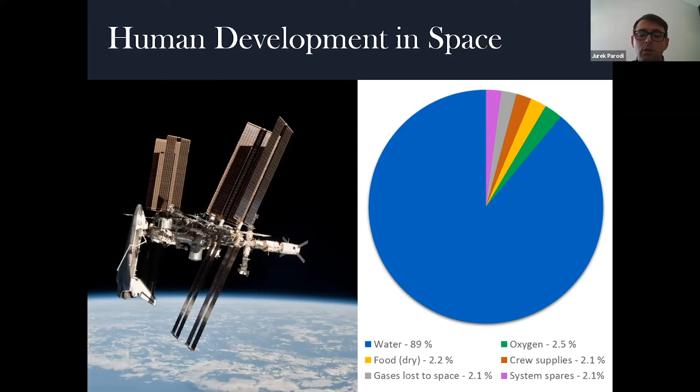Now, going back to the past, water has always been the lifeblood of early human civilizations. The ability of these ancient societies to harness the power of water is basically what facilitated the rise of agriculture and also of the first cities, the first urban centers. This water was so important to these early societies that historians actually refer to them as river valley civilizations.

One of the most powerful civilizations of the past, Rome, made great advances in the movement and the use of water. Rome was the most populous city in the world during the classical ages, with an estimated population of 1.7 million people during the reign of Emperor Augustus. So maintaining the supply of fresh water was a constant challenge for the city and for the city's authorities.

This problem was actually overcome by a system of aqueducts that transported fresh water from the countryside into the urban area. And Roman cities used water in unprecedented volumes. For example, Rome used about 5 times the water compared to San Francisco today.

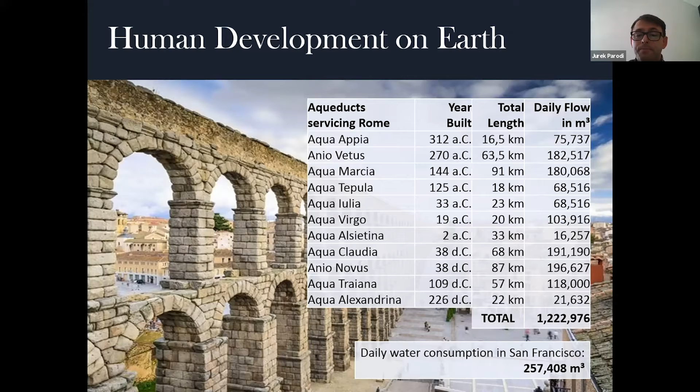Okay, so I'll take over here, right, Jurek? Yes, go ahead, Michael.

So, talking a little bit closer to home, water has traditionally been the limiting factor for development in the Western United States. Access to water historically has controlled development throughout the state, and that's currently the situation as well. I'm sure many of you are familiar with the limitations associated with San Francisco and the peninsula area, and also in Monterey, where water has become basically the spigot that turns on and off development.

In a lot of communities in San Francisco and on the peninsula, any large-scale developments are currently requiring you to provide your own sources of water and your own sources of sewage treatment. The Monterey area, Santa Cruz area has the longest history of this. When I was just starting to work, 30 years ago, I participated in some state of California projects looking at desalination, mainly at the Moss Landing power plant there.

And I remember the state governor at that time saying that he felt that it would be between 20 years and never before Monterey resolved its water problems. And that was about 30 years ago. Seems like the never is more likely than any big desal plants coming into the region.

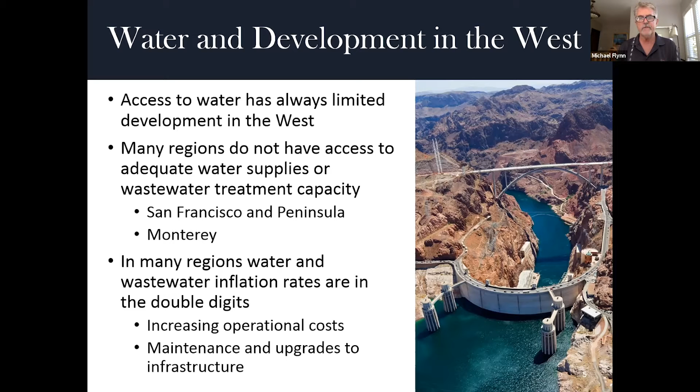But generally, throughout the United States, and particularly in the West, we see that there are 2 main factors that really affect the availability of water and the cost of that water. One of them is increasing operational costs that increase at generally the rate of inflation. And the main one is maintenance and upgrades to infrastructure. Most of the water systems and waste treatment systems in the Western United States were installed over 50 years ago, and they've reached the end of their useful life. And so that means digging up pipe and replacing pipe. And that can be extremely expensive.

This slide shows the results of a study that was done by the American Society of Civil Engineers, and it's a few years old at this point. But at that time, they had done a survey in the United States, and this is just looking at water delivery, not sewer. They found that there was $348 billion in unfinanced upgrade projects. And these are mainly digging up the road and replacing the pipe up to the consumer's house. The vast majority of those costs were included in that.

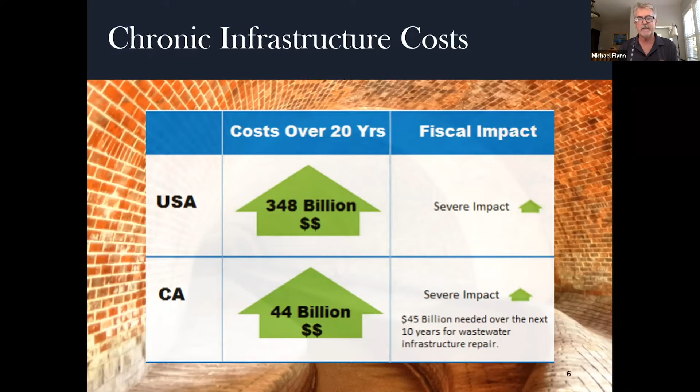California's portion of that was about $44 billion over the next 20 years for water. And if you include sewer issues, California has a requirement of about $45 billion over the next 10 years for infrastructure repair for both water and sewer. And so this is driving water to be actually one of the most inflationary commodities in your life these days. Let's go to the next slide.

So this is a study that was done by USA Today. It's also a little bit old. I think it covered the period from about 2005 to about 2015. So this is looking at published inflation rates for water districts throughout the United States. And these are over 10 years. So this is inflation over a 10-year period. So if you want to know yearly inflation, you have to add a decimal point. So for instance, in Oakland, where it says 68%, the yearly inflation averaged out would be about 6.8% inflation in that area.

And then at the highest level here, we see San Francisco, which during that period had an inflation rate of 21% per year in their water and sewer requirements. And Atlanta is also another interesting place that had about a 23% inflation rate. The situation in Atlanta was so bad that there was sort of a rebellion within the government and within the populace, and they actually removed the requirement for ratepayers to pay the increased price, and they moved the majority of that cost over to a sales tax. So Atlanta has one of the highest sales taxes in the nation right now because they're covering their water and sewer costs through sales tax rather than passing the cost on to the consumer.

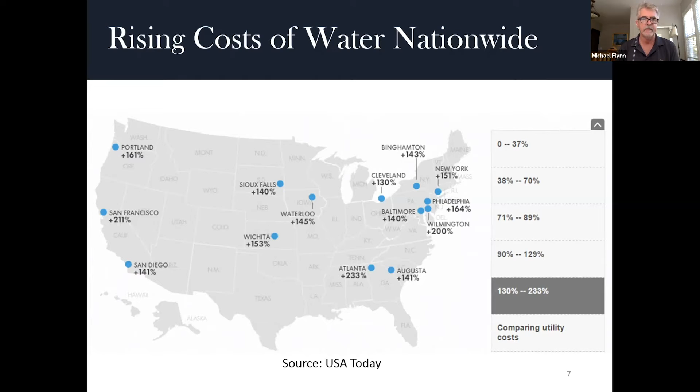San Francisco is also very interesting. A lot of the 21% rate you see there dates back to a period of time when they did a major renovation of their sewer system. San Francisco is one of those cities where all the sewers in the streets ran out into the ocean. And there was a lawsuit against them. So they had to connect them up to the sewers and then expand sewer treatment plants in order to accommodate that. But San Francisco is a good case example. Let's go to the next slide, because they've kind of been a leader in the development of decentralized water recycling systems.

So if you want to build a large building in the city of San Francisco, they do not have water capacity to provide to you. And they also don't have sewer capacity to provide to you. So the city of San Francisco passed an ordinance, the Recycled Water Ordinance, that requires property owners to install recycled water systems in certain types of new construction, modification, or remodel projects.

So these requirements are levied to areas that have a lot of commercial development. So the downtown area of San Francisco, South Beach area, are all covered by that. And also on the avenues where they're extremely water and sewer limited. So all new construction in the city of San Francisco over 40,000 square feet has to recycle its water.

So you guys are all probably familiar with that big Salesforce tower. That fell under this requirement. So that Salesforce tower actually recycles all their black water, purifies it, and reuses it to flush the toilets. In fact, all new buildings that were permitted after about 2018 in the city of San Francisco that are over 40,000 square feet, subdivisions, or new and existing irrigated areas over 10,000 square feet are required to have water recycling systems installed. And those can be both gray water and black water requirements.

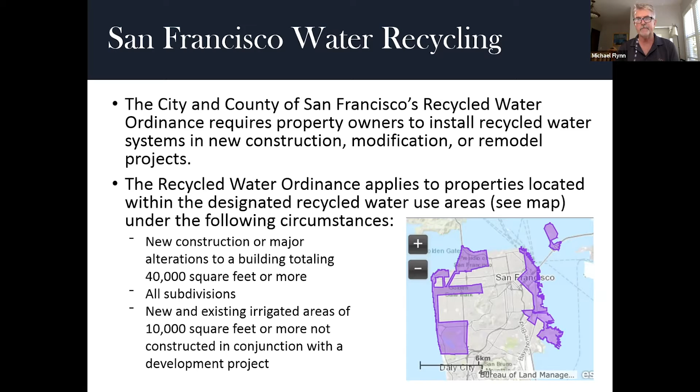And in 2021, according to the published rates in the city of San Francisco, it will actually be cheaper to recycle water in your facility than to purchase water and sewer capability from the city. And that does not include the hookup charges. The hookup charges you have to pay anyway. You can't just recycle your water without being hooked up to the city of San Francisco systems as well. So let's go to the next slide.

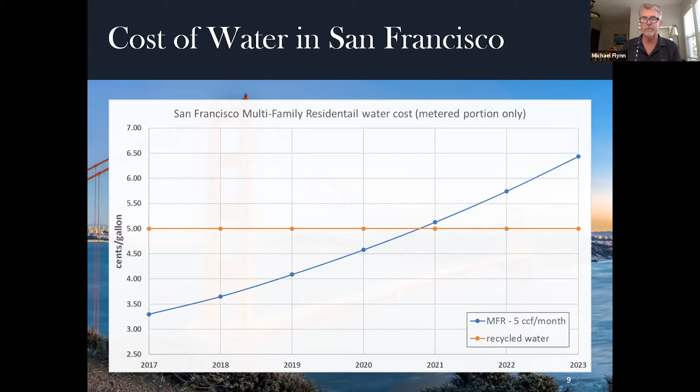So let's get a little closer and talk about Monterey and the history of water in Monterey. The history of water in Monterey has been quite a battle over many, many years. There's been a lot of proposals to build dams, and those have all basically failed. There's been a lot of talk about desalination, and those have come pretty close to going forward, but they've never really made it to the end point. I know the most recent desalination project, I think, was just recently stopped or terminated by the local agencies, and I think Cal-Am even kind of stepped away from that desalination project.

There's also been a lot of state boards that have stepped in, because pumping water from the Carmel River has been violating state regulations for many years. The Carmel River does not flow to the ocean all year round, and that's because so much water is being extracted from it that during the summer months it basically runs dry, which is a violation of many different environmental regulations within the state of California.

And so the state has basically stepped in and started to require Cal-Am and the local region to come up with other approaches in order to resolve that issue. And the most important one is the Order 95-10, which required for them to stop pumping water from the Carmel River in 2017, which I don't think they did.

Then there also was a Sustainable Groundwater Act that dealt with pumping groundwater out of local regions, that limited the amount of groundwater that you can pump out in different areas. There was also more recently Measure J that was passed locally to address public ownership of water delivery systems in District 8, and that's dealing with the Cal-Am issue of a private water delivery system.

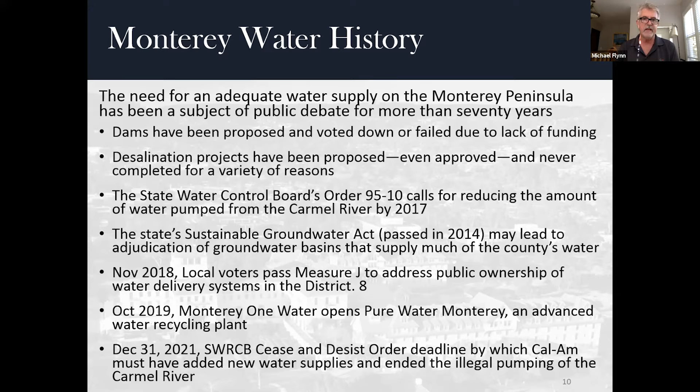Basically what it did, it said that if you install in a house or in a commercial building a gray water recycling system, you can reduce the accounting of a fixture unit by 70%. That means that if you have a toilet, that toilet only incurs a 30% fixture unit requirement for doing your calculations on how many toilets you can have and the meter size that you are providing.

It also went further to include clothes washing. So that gray water can be reused both for toilet flushing, which is commonly done, that's what most people do with gray water, and also for clothes washing, which is actually a little bit progressive. That's a use that typically has used potable water. And so allowing clothes washing is sort of stepping a little bit out in front of the curve by the local jurisdictions. This resolution also requires that these gray water systems provide 100% of the demand.

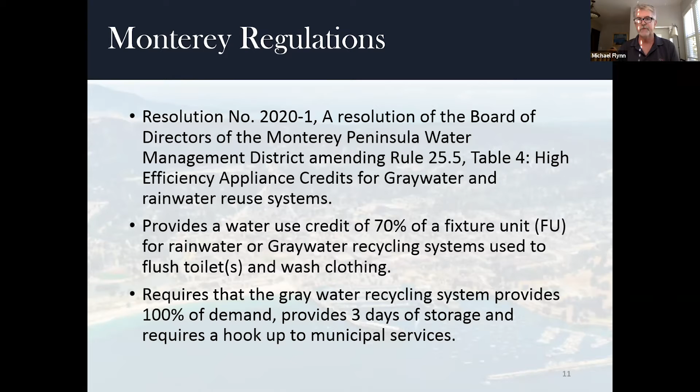So you have to be able to reuse your gray water and, if you're doing toilets, meet all of the toilet demand and also all of the clothes washing demand. It also requires a 3-day storage of product water for doing those applications. And it does also require that you hook up to the city water source and to the sewer. So even if you're not going to be using those for the supply of water for toilet flushing, you actually still have to have the hookup there. So let's go to the next slide.

For instance, the issues we were talking about with withdrawing water from the Carmel River. If the local community was able to come anywhere near to reducing their water consumption by 45%, that in itself would resolve the water issues associated with the Carmel River. So this amendment is actually quite powerful. The issue is what are the economics? How do you make it practically work in those particular applications? That's the devil in the detail that still needs to be resolved in this area. But the situation in Monterey has recently changed.

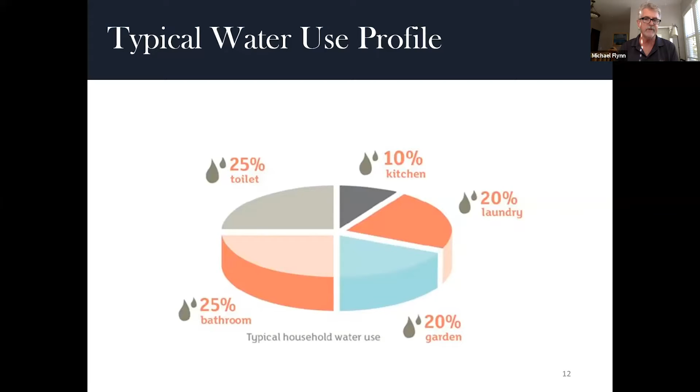It used to be that gray water recycling at a distributed level, at the individual home level or the commercial level, was not actually allowed, was not permitted. And that has changed, and now it is actually permitted. Let's go to the next slide.

So let's step back and just talk a little bit about the state of California too, because just like the local Monterey issue, California also has substantial water scarcity issues. The recent drought of 2014, I think, brought that home to all of us. And in response to that, there's been several bills that have been passed that I think are extremely important. The most important one is SB 966.

What this says is that the state of California has to develop water recycling regulations that cover the entire state of California. So this includes gray water, it includes black water recycling, it includes rainwater recycling, it includes groundwater recycling as well. And this requires by 2021 that the state shall publish regulations that can be picked up by local communities and utilized to provide water recycling capabilities.

The biggest hindrance to implementing, if you're like an architect who wants to build a building that includes water recycling, the biggest hindrance is if you live in an area that doesn't have established regulations and an established permitting process. That means that you're going to be the first, you're going to be the trailblazer, and that's going to be extremely expensive. You're going to have to hire lawyers, you're going to have to hire a lot of engineers, you're going to have to go on an individual one-off basis to try to get approval. And that's going to just certainly drive the price up and make it unrealistic to achieve.

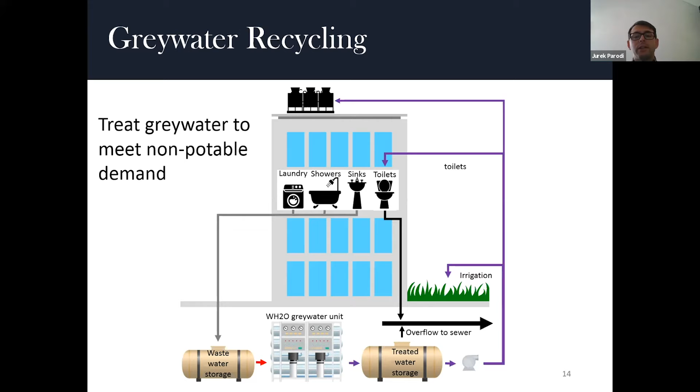So in the case of black water, the main users of black water treatment are actually commercial buildings. The reason why is that commercial buildings usually do not produce enough gray water to meet the non-potable demand. So if you want to provide all the recycled water that meets the demand of irrigation, toilet flushing, and cooling towers, well, there's no other way around recycling all the wastewater, so both gray water and black water.

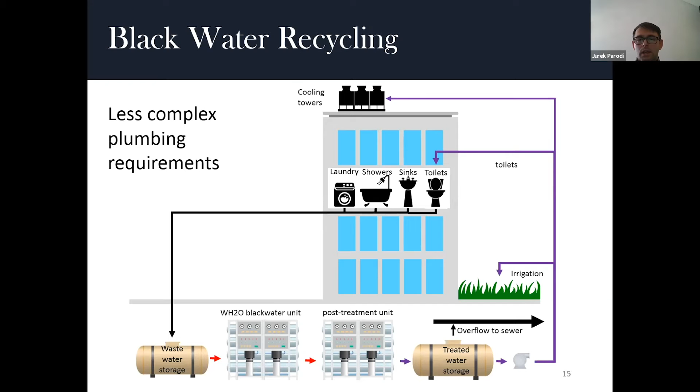So a couple of different benefits for both systems. So gray water, obviously, the capital cost of the system itself is lower compared to a black water recycling system. It is easier, it is simpler to get the permits for the installation of such a system, and also the analytical requirements, so all the tests required to prove the quality of the effluent, are not as strict as for black water recycling systems. They are cheaper to operate in general and to maintain.

Although this really depends on the particular situation, it's more of a case-by-case scenario. The disadvantage for gray water recycling systems compared to black water, as I mentioned earlier, is dual plumbing. Sometimes the cost of this dual plumbing can actually exceed the cost of the water recycling system itself, and in several cases, even by a factor of 2 or 3.

So now let's talk about the black water recycling systems. As I mentioned, the systems don't require dual plumbing, at least from the collection point of view. Obviously, if you're reintroducing the recycled water back inside the building to flush toilets, there still needs to be a separate, dedicated line for that. The black water recycling system has a slightly higher capital cost, and that's due to the fact that it also needs some additional pre-treatment and sometimes post-treatment, depending on the application and also on the regulations.

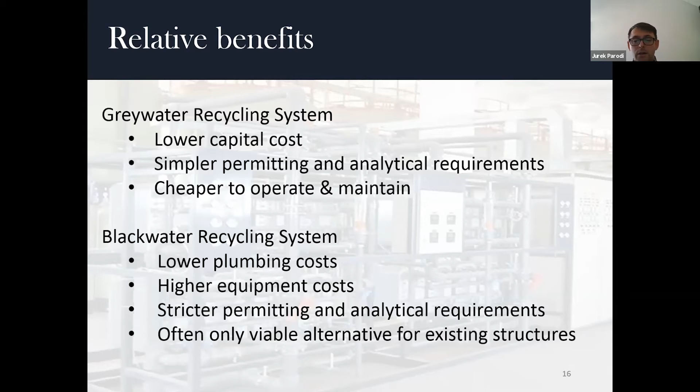So to give a couple of examples of case studies that we have done on systems, both residential and commercial. The first one is a multifamily residential tower in San Francisco. The building has not been constructed yet; there will be more than 700 occupants. The numbers in these tables show that the total gray water supply in gallons per day is about 24,800. Now, this particular building has very limited irrigation, so most of the non-potable water goes back into toilet flushing.

So this non-potable demand is only 12,700 gallons per day. So as you can see, basically, the total gray water available is almost double the total non-potable demand. So in this case, it makes sense to recycle gray water only.

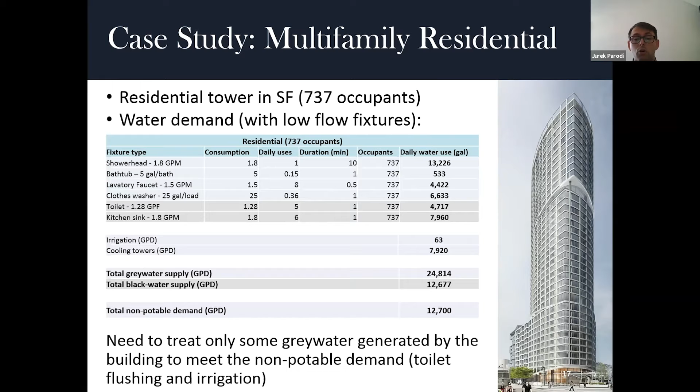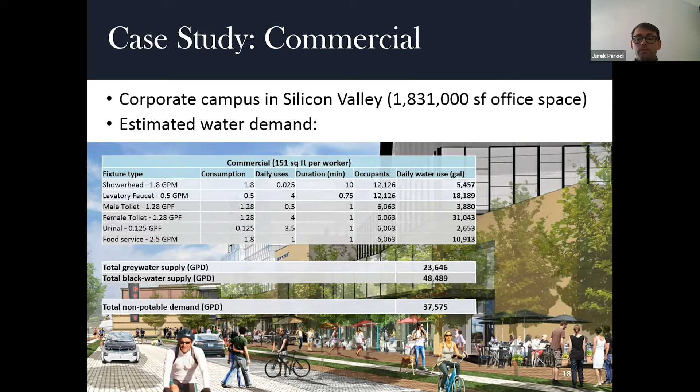Now, in a commercial building, and this particular case study is for a campus of a high-tech company here in the Bay Area, as you can see from the tables, the total gray water supply is only around 23,000 gallons per day, while the total non-potable demand is more than 37,000 gallons per day. So in this particular case, you have to recycle both gray water and black water in order to meet your non-potable demand.

So this is a brief introduction. Michael already mentioned how WH2Osystems was born, but basically it was founded 3 years ago by a team of former engineers from NASA that saw the issues here following the drought that happened in California a few years ago,

and following the fact that the government has invested millions of dollars over the past 30 years to advance water recycling technologies. As I mentioned earlier, right now the space station recycles only about 75% of its water. In order to go to the moon, to have a base on the moon, or even worse, in order to go to Mars and then have a base on Mars, 75% of water recycling is not feasible.

The costs related to providing this needed resupply of water throughout the mission would be too expensive. And so the mission would be a no-go since the very beginning. The only way to get there is to increase that water recovery rate. So go from the current 75% to 95+%, ideally to 100%, although we know that's not possible. But basically at the 95% water recovery rate, that's when a mission to Mars would actually become possible.

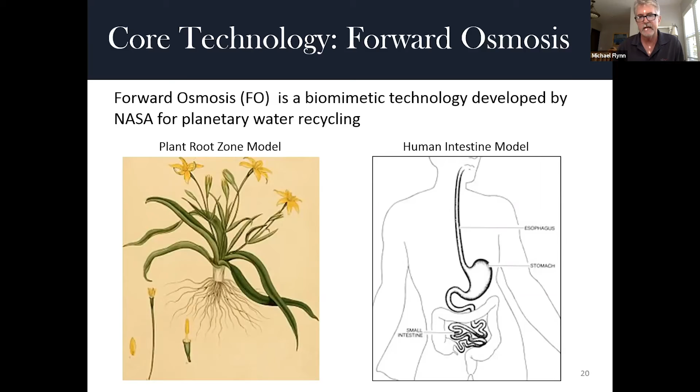Let's go to the next slide. Also a very simple technology. I'm just gonna give you an example of how forward osmosis works. If we have a cup of water and we separate that cup into 2 halves by gluing a membrane between the 2 halves of the cup, and the membrane will allow water to pass, but it will not allow salt to pass. And then on one side, we put tap water, and the other side, we put salt water. What will happen is that the water from the tap side will pass into the membrane to dilute out the salt water. And this is driven by a force called entropy.

Entropy is a force that sort of predominates everything in the universe. Basically, what it says is that systems go from order to disorder. They fall apart. And if you want to go in the opposite direction, you actually have to put energy in them to go the opposite direction. So when we started off with tap water on one side of the membrane and salt water on the other side, that was a very ordered system. And so it wants to go to its lowest energy state, which is disorder, which is to transfer water across the membrane and dilute out the saltwater solution.

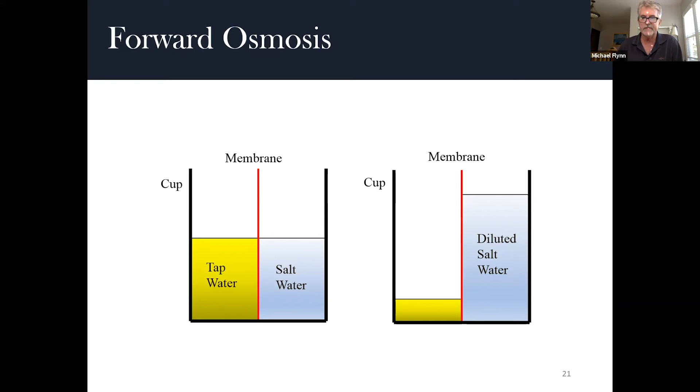And then we're creating this dilute saltwater solution. So we take the saltwater solution and we reconstitute the saltwater solution in an RO membrane or an RO module, or it could be a distillation module, it could be a cooling tower. There are a variety of different technologies that can be used in that place. But the key is that in there, we separate the water back out of the salt solution and then reconstitute the salt solution and provide it back to the FO membrane contactors for reuse.

This is very similar to how the cells in your body work in the blood. Your small intestine acts as a forward osmosis module, extracts water that you consume, puts it into your blood. The blood then goes to the cells. The cells extract pure water from the blood plasma and then recirculate the blood plasma back into your small intestine.

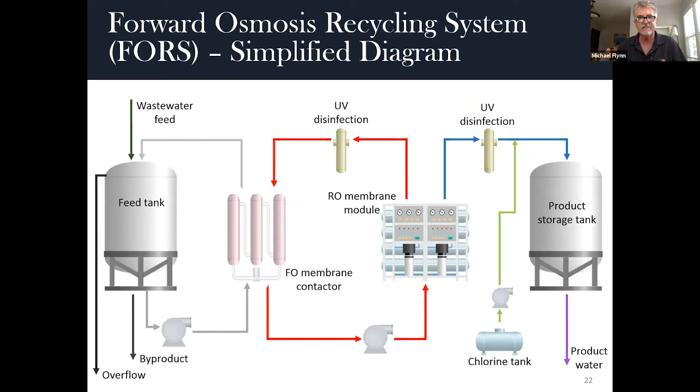So this is what we call a biomimetic technology. The reason for developing it was we were trying to develop a new class of water recycling systems that had a level of reliability that was orders of magnitude above what the current state of the art is. And so we went and looked at biological processes and took the lessons learned from them and integrated them to develop this technology. So let's go to the next slide.

So we're going to go through some case examples. Since we're short on time, I'll go briefly through some of the projects that we have done in different case studies. So the very first greywater recycling system that we have developed, which is the first continuously operating greywater recycling system in California, is actually at Moffett Field here in California. And it provides recycled water for toilet flushing inside an office building that hosts about 220 workers.

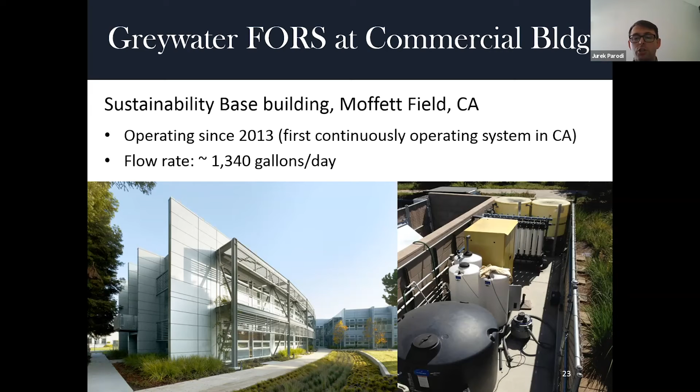This system, however, is the biggest from a flow rate point of view. In fact, it treats about 4,800 gallons per day. So this is, let's say, between 3 and 4 times the system that we have installed at the office building. And it's also contained in such a small footprint.

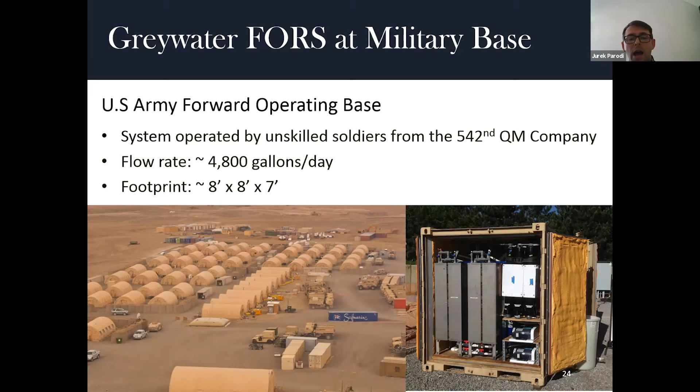Well, not only that, this particular system had to be transported, airlifted, and airdropped. So there were also a lot of other requirements. It is used in these so-called forward operating bases, which are the smallest bases surrounded by defense walls that the U.S. Army uses in Afghanistan. So that's where the system operates.

Since we are here in California and close to Napa and Sonoma Valley, we have also developed systems for winery wastewater, which is in reality one of the toughest, most challenging wastewaters to be treated. So we have used forward osmosis, but we have used it in synergy with other technologies. In particular, in this case, it was distillation. And that's in order to achieve an even higher water recovery rate.

So as I mentioned earlier, right now the forward osmosis system can achieve about a 75 to 80% water recovery rate. However, in order to get beyond that 80%, we installed other technologies, for example, distillation. That allows us to go well beyond a 90% water recovery rate.

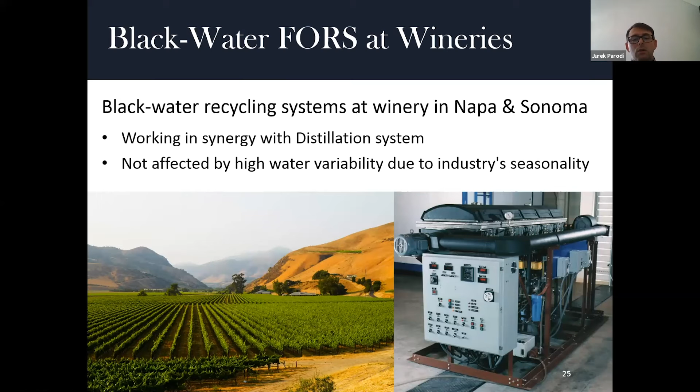Another great application for forward osmosis is cooling towers. As Michael mentioned earlier, the second part of the system, the one that basically concentrates the so-called osmotic agent, can be done in different ways. And one of them is through the waste heat that is generated at cooling towers. So basically, this is a very cheap and effective way to recycle water. And also very safe because there's no human contact in this case. All commercial buildings, big data centers that use a lot of water for cooling, can reduce their water consumption by up to 90%.

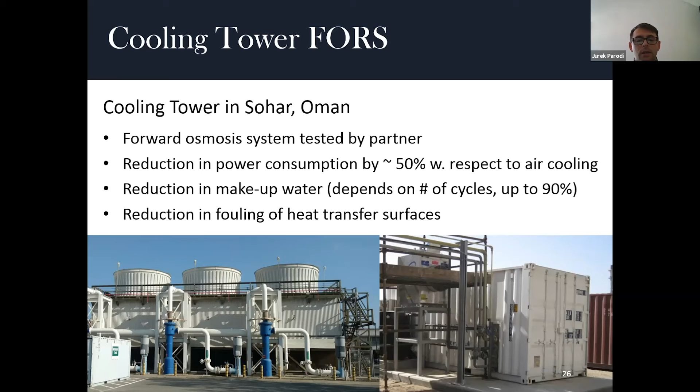And then another system that we have been developing, and this was actually our first black water recycling system, was developed for a high-tech campus here in Silicon Valley. Being the very first black water recycling system that we have developed, the customer wanted to validate it using a third party, which in this case was Stanford University.

So basically, we built the system, we sent it to Stanford, and Stanford operated it for about a year. They collected samples of the effluent every day, and they were doing biological and chemical analysis every day in order to validate it.

And finally, another system that we have been developing, and we are actually currently developing, is for the food and beverage industry, for a big multinational that does both carbonated drinks and high sugary drinks and also snack food. In this particular case, the wastewater is also challenging because of the very high content in sugars, electrolytes, salt, food residues.

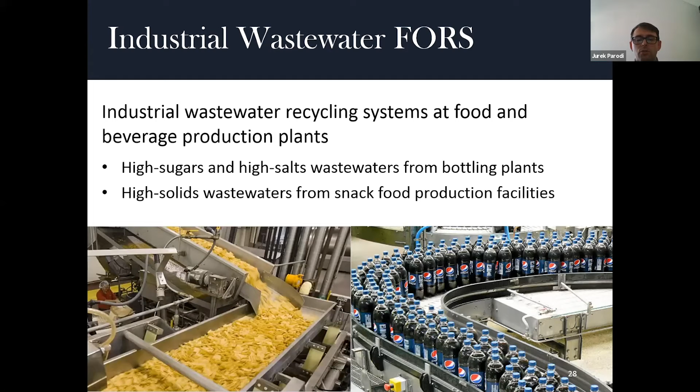Oh, and finally, actually, this was, I think, my last slide. We also developed a system that is mobile, so it can be moved around. It's installed in a 6x10 trailer, and this system is actually pretty small. It treats about 150 gallons per day. This is basically the flow rate, the volumes that are applicable to a large single family home. A single family house would probably use somewhere around 100 and 150 gallons per day.

So in terms of water quality, Michael, you want to go through these ones? Yeah, so one of the things that came out of the testing from Stanford was a comparison of the performance of the forward osmosis system and the existing regulations with respect to recycling wastewater. This doesn't take into account the new activities going on with the state of California, but if you look at, for instance, the plumbing code, the National Sanitation Foundation has published some directions through NSF 350. And then the city of San Francisco has very detailed gray water and black water recycling requirements.

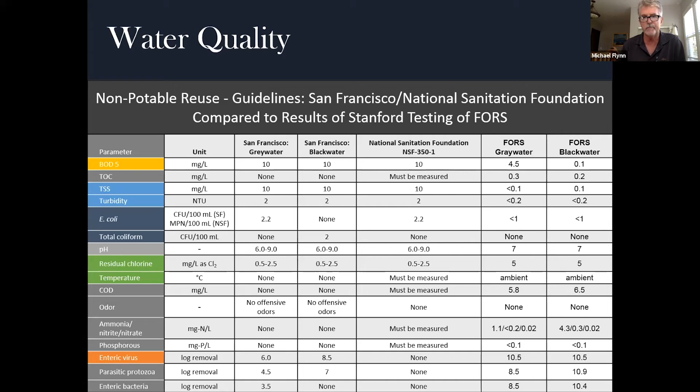This table basically goes down through all those requirements and shows you that the FO, both for gray water and black water systems, meets all of those requirements. So the system as it is right now can be permitted regardless of whether you're using the San Francisco standards or the National Sanitation Foundation standards. It's expected that the new direction the state of California will be coming up with will be more based around the city of San Francisco requirements. So I think they're the more important ones to be looking at in a table like this. Let's go to the next slide.

The other issue is the future. If you invest in one of these kinds of technologies and you meet all the permitting requirements that exist right now, what about contemplated future permitting requirements? These are mainly associated with things called contaminants of emerging concern. These are things like medicines that you use that end up in the sewage, and we at this time don't totally understand their implications to human health. They're currently not regulated in wastewater, but they're a concern, and it's likely that in the future there may be regulations there as well.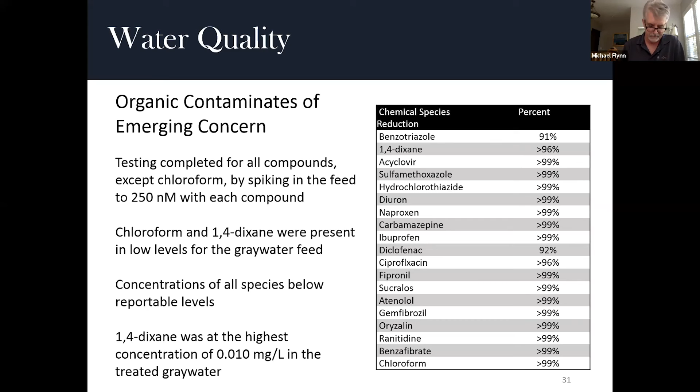So let's talk briefly about economics. Our costs are typically around 4 cents per gallon. Of course, that's highly impacted by whether you need double plumbing and what the site layout is. For commercial, larger scale applications like office buildings, we almost always have a positive IRR for both 16 and 32-year time frames. But again, there are things that can influence that, like how the building is set up.

If you look at Monterey, the economics in Monterey are actually a little bit difficult. One part of it is that the cost of water in Monterey is extremely high, depending on where you live and the specifics. It can be as high as 1 cent per gallon.

The bad is that there's not a per gallon charge for sewage. Normally, sewage is your big cost. Normally, you'll be below a penny a gallon for potable water, and you'll be up in the 2, 3, up as high as 8 or 10 cents per gallon on your sewer costs.

And locations that are sort of supportive of water recycling systems usually always have a per gallon charge. There's a fixed charge and then a per gallon charge for both the water and the sewer. And Monterey does not have that for the sewage. So the economics probably don't make sense.

So if you're going to install a water recycling system in the Monterey area, you're not going to do it from the standpoint of saving money, because you can't not pay the sewer fee. You have to pay the sewer fee. There's no way around it. The reason you're going to do it is actually based on permitting requirements. It's the fact that you can get that 70% savings on a fixture in those applications.

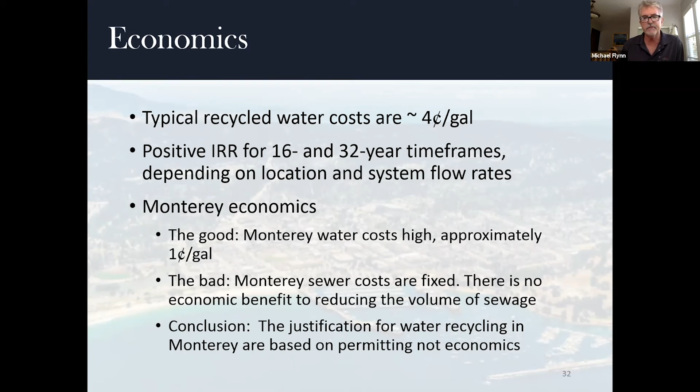This is just kind of a comparison between our technology and our competitors' technologies. We're a non-biological process. Most of our competitors are biological. And our system will reject both organics and inorganics. The biological processes typically don't reject inorganics unless they have some sort of a non-biological post-treatment system attached to them.

Our system is very well suited for dealing with calcium scaling, for very high solids and hazardous feeds. For instance, you can pour chlorine bleach down the drain into our system and it won't hurt it. If you did that to a biological system, that would probably kill it. We have a relatively lower volume footprint. We're about 30 to 40% of the footprint of a competing biological system.

And we have very high water recycling ratios and a very low carbon footprint. The biological processes are converting all the organics into carbon dioxide and potentially methane. And of course, we're not. We're actually sequestering all those organics into a concentrated byproduct that is either taken all the way to dryness or is removed and taken to a sewage treatment system where that carbon can actually be regenerated and turned into electricity and used to run the process.

We also have lower energy consumption than biological processes. We're typically always under 18 watt hours per gallon, in many applications as low as 11. Again, I talked about the targeted economics, and we're scalable to any size. It's a fully automated system and does not require a trained operator on site unless you're doing black water treatment, which the state currently does require a licensed operator for. And as with the biological processes, you can get about 10 LEED points from integrating the system.

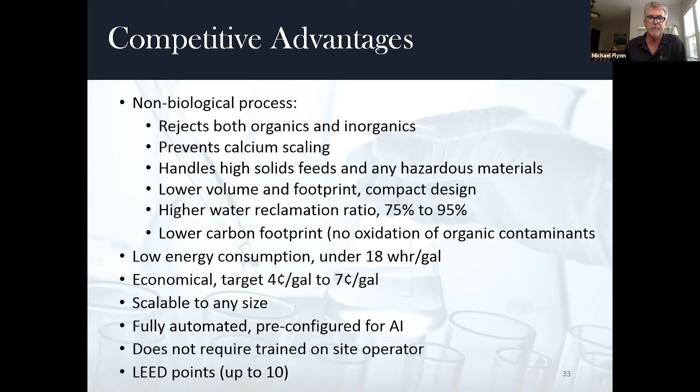And then we have some really unique financing and billing options. You don't necessarily have to buy the equipment if you don't want to. We can use that kind of cell phone model where you just sign a long-term contract and you pay about what you pay right now for water, and you don't ever have to pay for the equipment. It's all kind of rolled up into a big lease type agreement that comes out in the end for us.

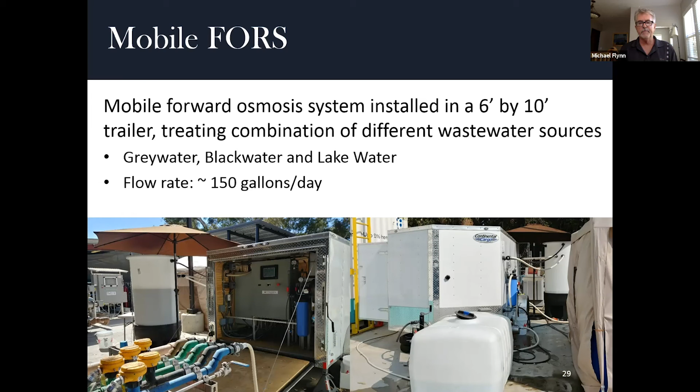Yeah, I think so. What it basically states is that usually you're limited by the meter size, right? The water credits are related to the meter size. What they're going to allow you to do is put in more demand than the meter can support, basically, which gets into the whole water credit thing. So for instance, if you're going to recycle the water to a toilet, that toilet is only going to count in the processing of your permit as 30% of what it would normally count as water credits.

Right. Which is modest. The further answer to this would be for projects that are within the Monterey Peninsula Water Management District. Within the district, yes. But if you're outside of that district, certainly by the end of 2021, the statewide requirements from SB 966 would apply. So if you are in a jurisdiction where they do not have any permitting requirements, by 2021 they will by default have permitting requirements. Okay.

And just to confirm, that resolution 2020-1 that you mentioned, that gives you credits for having the greywater recycling system, you're saying that was approved and in effect? Because that's sort of a big deal here on the peninsula, and I wasn't aware of that myself. In effect, yes. Basically what it did is it went back to a previous document, I think it was document 54, which provided all those credits for, like, if you used a tankless hot water heater system and low flow fixtures. They had an appendix with a table in it.